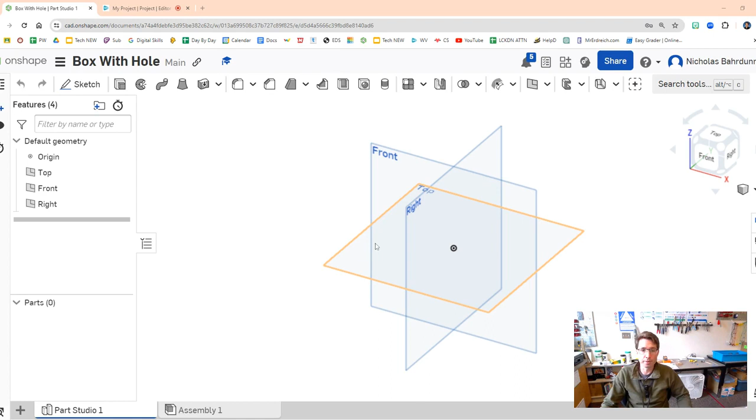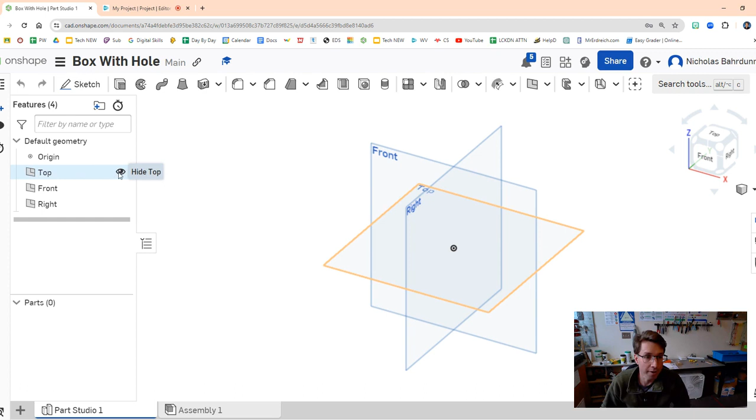The first thing you're going to see is our 3 work planes: top, front, and right. You can click here on the view cube to change the view, or right click to orbit around. If you hold shift and right click, or control right click, you can actually move the center. For today's project, I'm going to turn off the front plane and the right plane by clicking on the eye icon for each, so that all I have left is top. These are still here, and I can turn those eyes back on, but I'm not going to use them today.

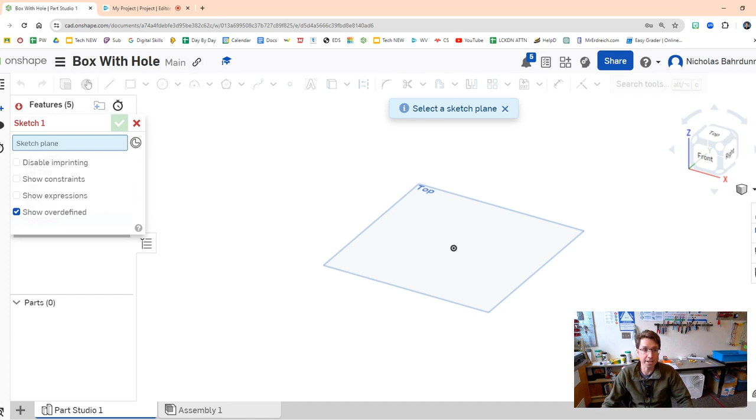In Onshape, we start everything with a sketch for a 2-dimensional shape, which we will extrude to make 3-dimensional. So let's click on Sketch. You don't immediately start drawing - you have to tell Onshape where you want to draw. We're going to want to draw on the top plane, so I'll use the view cube and click on top to get a straight down view.

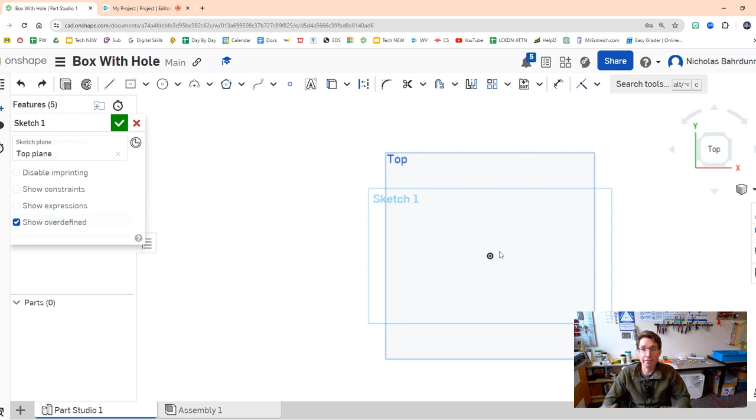Let's zoom out a bit. Now, when you're in Sketch, your menus change to the 2-dimensional sketch menu, and when you're done with your sketch, it'll switch to 3D. So today we're making a box, so I'm going to go to rectangle. I don't want corner rectangle, so click the drop arrow and choose center point rectangle. This way, if I line everything up with the origin - the actual center of all my work planes - everything will be perfectly lined up. Onshape does a great job helping you make sure it's all lined up.

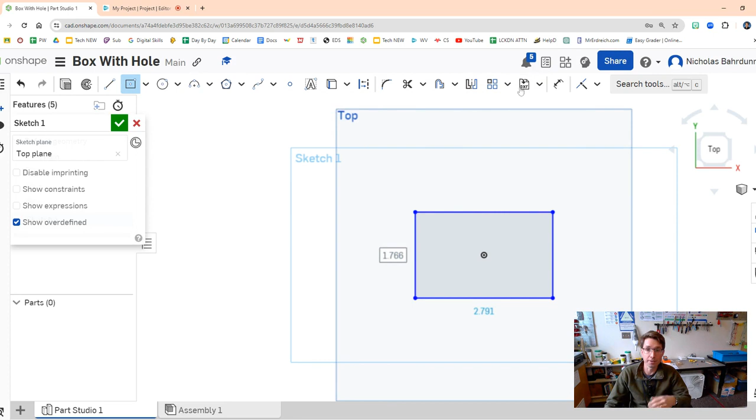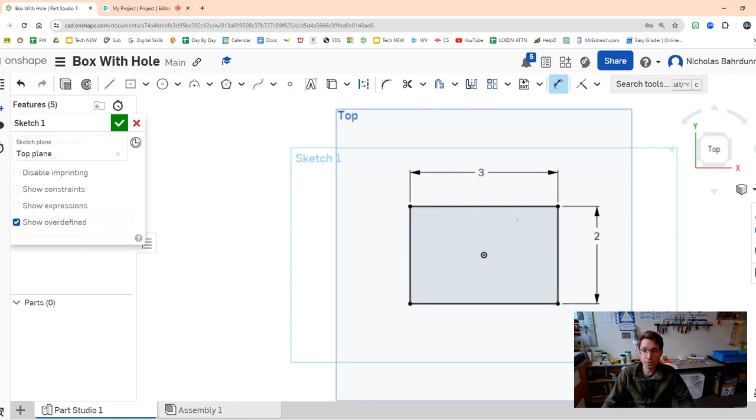So let's come right here, click, and drag it out. I'm not going to be careful with my dimensions because I'm going to use the dimension tool, this one right here, which should still be available in your sketch menu. Click on dimension, and click on the side you want to change. On this rectangle, I want my length to be 3 inches, so click on that, numlock 3, enter. For my width, I want to make this 2, so click 2, enter. Now I have a 3x2 rectangle.

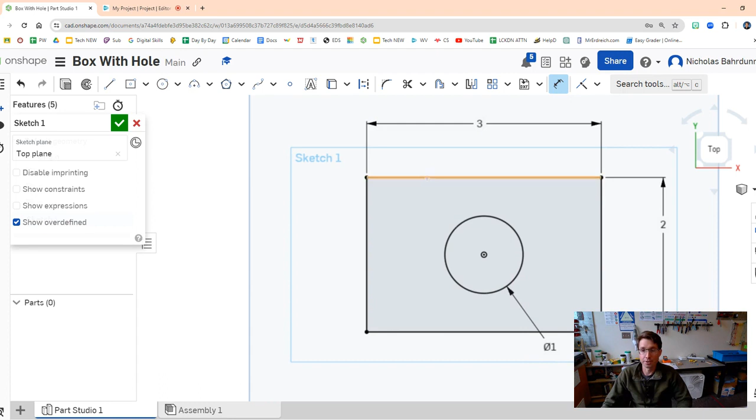I'm not done yet. I want to go ahead and do a center point circle here, zoom in from the origin out - you don't need to be careful because you're going to dimension it as well - and we're going to make that 1. So it's simply 3, 2, 1. Now I have my 2-dimensional sketch that includes all the shapes. This will be the first screenshot you're going to take, labeled top view sketch with dimensions, because it has my dimensions, my actual distances for each thing.

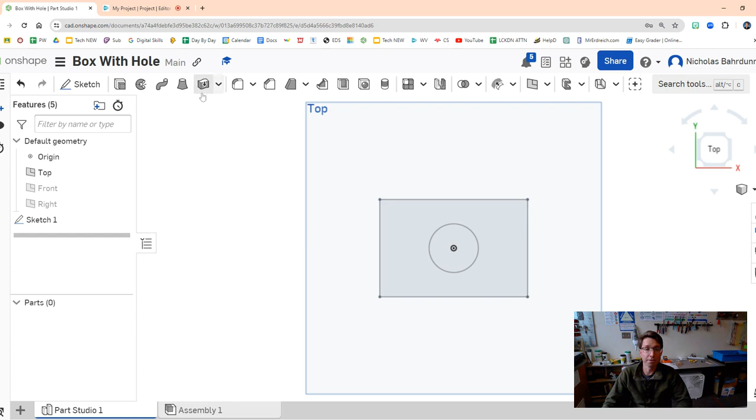Now let's click the green check, which confirms my sketch, and you'll see my menu switches into the 3D menu. My sketch is still flat, still 2D. I'm going to click on this corner here to get into my isometric view and zoom out. When you see isometric or diagonal view, you're coming from this viewpoint right there on that circle.

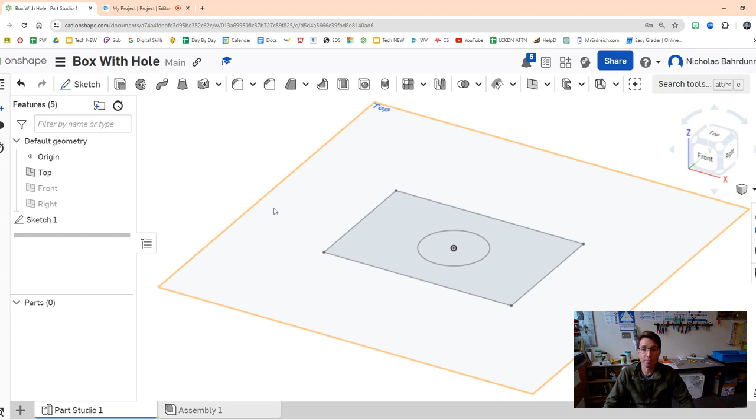Now we're going to click extrude, which is how you make a 2-dimensional shape 3-dimensional. So click on extrude, and we're going to want to extrude the box, but not the hole. Click on the box here - do you see how the hole stays? If you were to click on the hole, it would include it, but we don't want that, so we're not going to click on it.

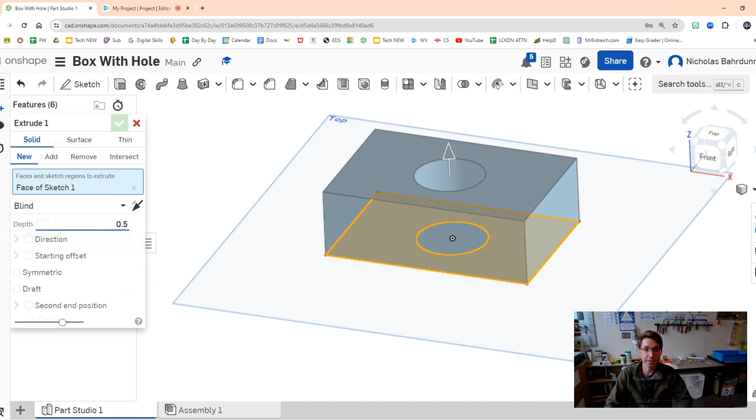I don't want my box to be a full inch tall, so I'm going to go to depth, blind, which means you just write down how far you want it to extrude. You have different options here, but we're just going to stick with blind. I'm going to make it 0.5 inches, a half inch tall, and then confirm the extrude, and boom, you have your first 3D shape in Onshape.

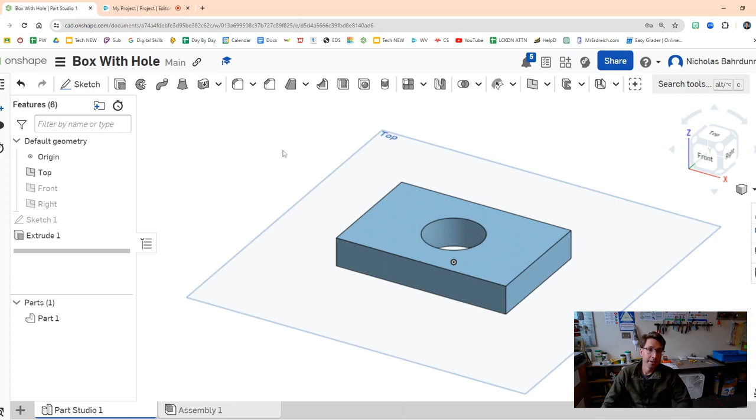Come back here to isometric. Now, in order to get credit for this assignment, you do need to put your name on your block. So you'll see on the assignment I say extrude remove your name. Simply put, here we do need a sketch onto the front face. So sketch first, click on the front face here.

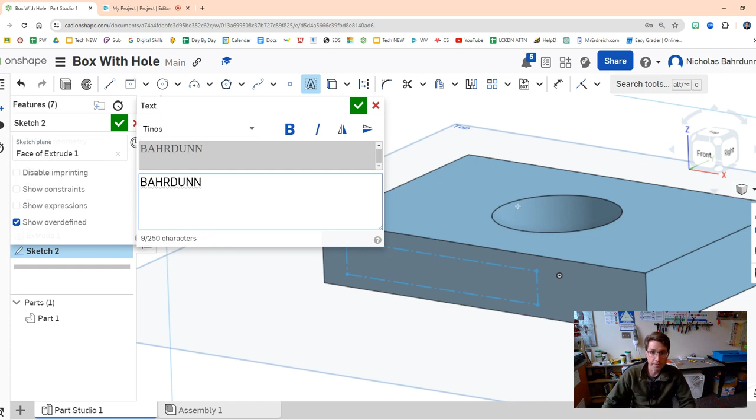And let's go ahead and pick out text, zoom in, and let's put your name here. So I'm going to put my name. There you go. Confirm that sketch, boom. And now I extrude remove my name.

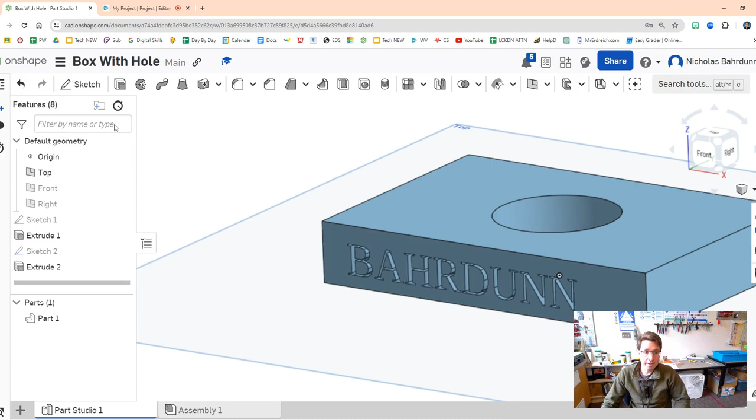So this is an extrude add. I want to do extrude remove. I don't want to remove a full inch out of it - I want to remove 1/10 of an inch. So 0.1, enter, and then confirm the extrude. And look, I've removed my name out of the side of the block.

So in your second screenshot, I want an isometric view of the box with the hole and your name extrude removed from the front. If you have any questions, come up and see me, and go ahead and get started.